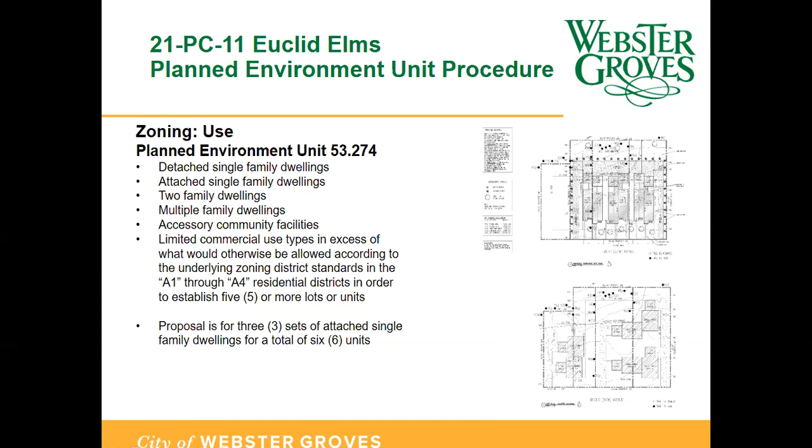When we look at density, this goes back to the 5 standard units under the basic A4 zoning requirements. Under the standard subdivision with the 120%, it would allow 6 units to be built versus the 5 in the standard subdivision. The proposal is for 3 sets of attached single-family dwellings for a total of 6 units. One plan in the packet was for townhouses attached to each other, all with a frontage on Euclid. The second proposal was for more, smaller clustered single-family homes with shared driveways to each pair, and would have 3 sets of driveways versus a one-way drive access. I'll go into more detail about the 2 different ones, but both of them were only proposing 6 units.

Under the dimensional regulations per the code, the minimum required front yard setback within the PEU gets established in one of 2 ways. You either take every house along that block and average them, but only if there's not a differentiation of more than 10 feet. In this case, because of the way the street works, there's a house on the far eastern corner that is very close to the street, making the differentiation more than 10 feet. So because of that, the front yard setback is established by the 2 closest properties on either side and the average of the 2 of them. Taking the 2 closest on either side of this grouping of properties, the average between them would establish a 19.04 setback from the front property line facing Euclid.

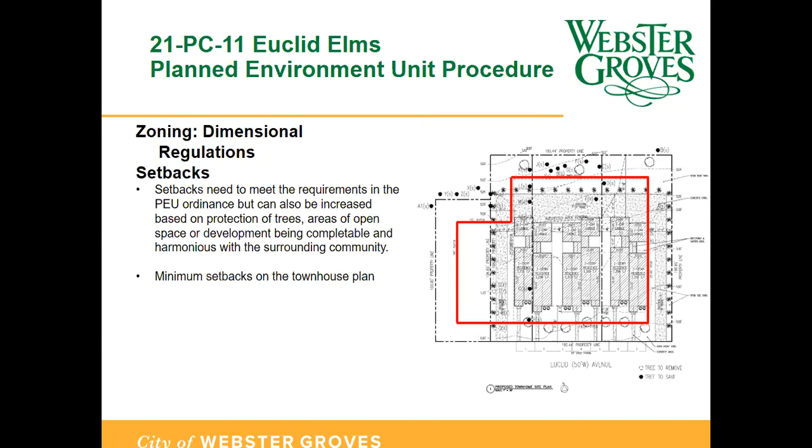This is the other scenario that proposes a series of clustered pairs. This is where the red setback minimum line is. Again, you can create something that's more unusual and you can do it as an attachment. It doesn't have to necessarily be - I know it's hard, sometimes there's the hard and fast rule of it being this many feet from a particular property line - but sometimes you can do it as an exhibit if you need a really unusual shaped setback.

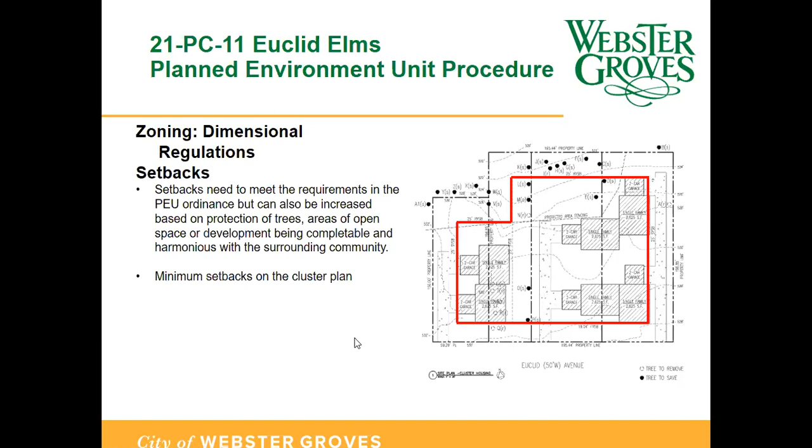The next dimensional regulation we always want to talk about is related to height. The PEU code allows a greater height than typically is allowed. Our A4 7,500 square foot residence district allows you to have 2.5 stories, no more than 35 feet. The way the PEU is established, you can have an increased outer buffer distance if you are going to exceed 3 stories. The proposal is not asking to go any taller than the 2.5 stories; in fact, it's proposing 2-story structures. So at this point, it's not asking for anything additional or any buffers because of that additional height.

Intensity of use is an important one because it covers 3 different things. It covers how much coverage is being done with structures on the property, which then relates directly to open space.

Lot coverage is a ratio of the footprint of the buildings in relationship to the overall size of the lot. We then also do a calculation related to floor area ratio. That is a ratio of the interior gross floor area of all stories of a structure in relationship to the total area of the lot.

And then the last one is minimum land area per dwelling unit. So when we have a requirement in our zoning code for a minimum lot area for a unit for a single family, we sometimes have reduced lot areas when we have multiple family. But in this underlying zoning of the A4, there's a minimum lot size requirement.

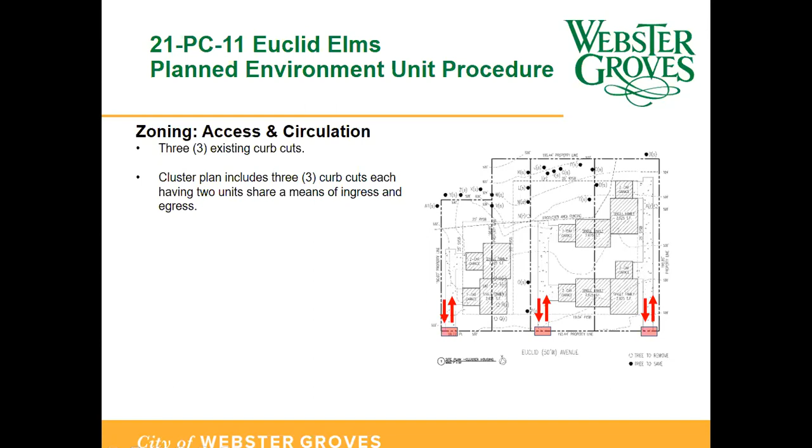So the next thing is Architecture Review Board. Every one of these structures will have to go before the Architecture Review Board. They would likely go through as a grouping together because of the way that they interact with one another. The applicant does plan to bring examples of housing types to the next meeting, because that will give some examples to help further develop what you think you need to put in the ordinance. But at this time, we weren't bringing any of those scenarios because we had so many other elements to make sure you understood that we needed to consider as we were looking forward for what additional information we might want from the applicants for the next meeting in order to establish a draft of the regulations.

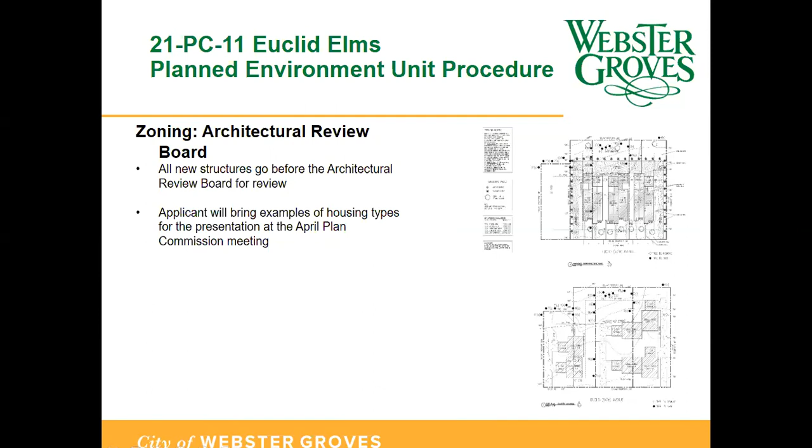So I'm about to get to the items to consider for inclusion in the ordinance. Before I get to that, are there any other questions about some of the analysis of the different elements?

I didn't necessarily have just one thing I didn't see in there, especially with that unbuildable lot. Do we know there's no existing easements or utilities of size in that area? There are none. It was not established as a paper street, and no easements were put in place for that area.

So for any of our members that are on Zoom, do any of you have questions? Okay, I'm going to move on. Nope, I'm going to move on to items for consideration for inclusion in the ordinance.

In your packets at the very end, I did start a very, very rough draft of some of the regulations, trying to keep in mind some of the important elements of consideration. One of the things would be placing a maximum number of units into the ordinance so that it's very clear how many units can be established.

The next thing would be creating setbacks. You have the ability to consider the setbacks that are in there, something that could be more restrictive, or a series of setbacks. You could make a requirement that certain units have to have a distance between them, but under the code, it's not required. So there's a minimum set, and then you can do others above and beyond.

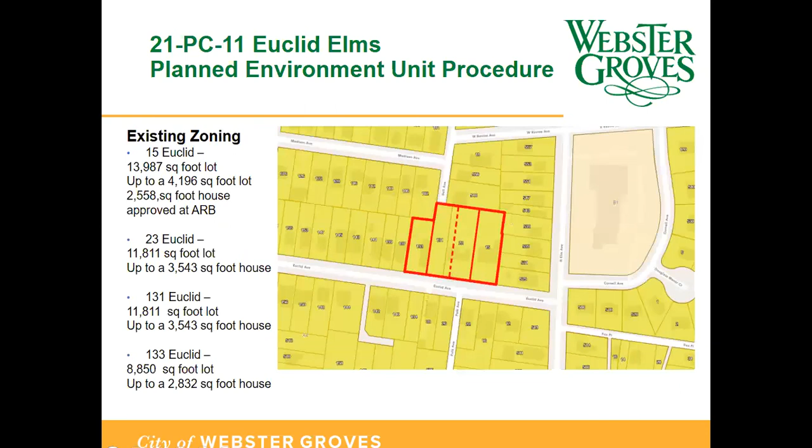Just so you know, their ordinance did not include a floor area ratio, because back in the 80s we didn't have a floor area ratio requirement. And their lots are interesting — if you look at how it shows up on our maps, there are these really large lots, but the condo plat is actually pretty tight. They gave them, I think, an extra 7 or 8 feet to do small decks off the backs of their homes, but the condo plat really establishes a very tight window around their structures.

Is that an A4 underlying zoning? Yes, that one was an A4 underlying, if I'm remembering correctly. And they did that to preserve the open space they had? They did that to preserve the open space and to preserve existing trees and tree canopy.

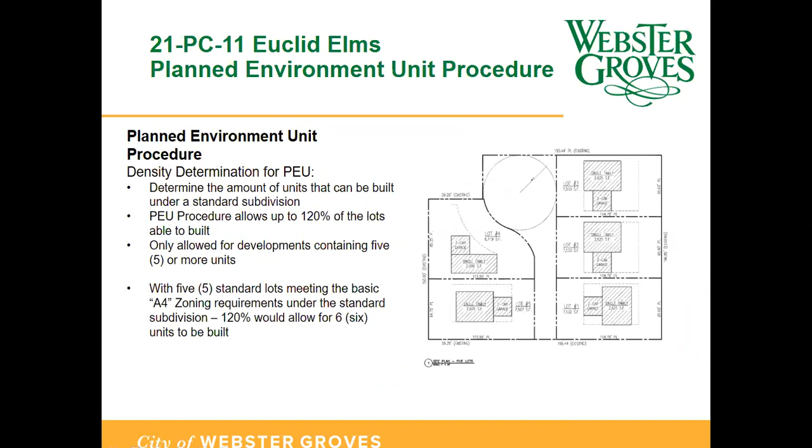My other question is about Hawken, Hawken Place, that's a condo, right? And was that a rezoning? That was a rezoning, to a B1, not a PEU. So that's a B1 multifamily, and then that was condoed out as townhouses.

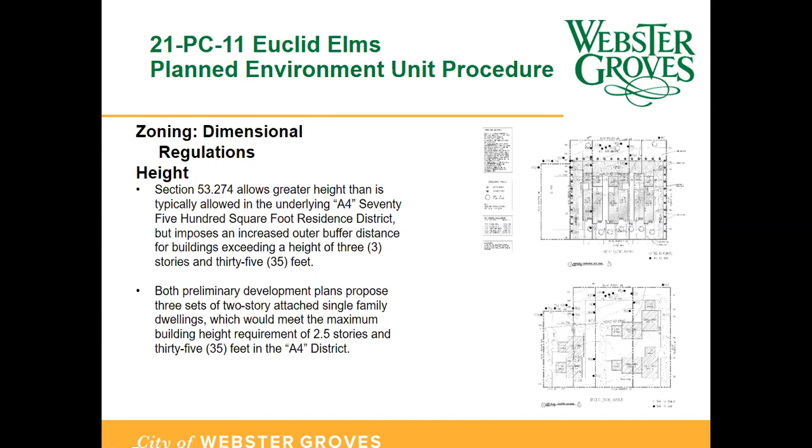Could you get us some numbers on floor area ratio and lot coverage of that development too, just to get an idea of sizing and mass? Yes, I will get the condo information for Hawken.

Thank you. Any other things, and this includes Plan Commission members online, any other things that you think you would like us, either staff or the applicant, to provide for the next meeting?

You said there were going to be drawings next meeting. They have some images of examples of the type of housing they're thinking about, in terms of the overall look, and of some other cluster type housing. They will be providing that, and it will be in the packets, so it will be available to both the commission and the public when the packets go out the Wednesday before the April Plan Commission meeting.

Why would a developer want to do a planned unit development? Is that just to avoid the rezoning? No, because you can't actually rezone this to do anything more. We're in the most intense zoning district already. These lots have minimum lot widths of 60 feet, so you can't cut them down any smaller unless they're going to put in the full turnaround and circle drive.

These lots are really deep, and in being really deep, it doesn't necessarily do much for the residents. The resident who buys the house could build a really big house on it, but might not, and then is paying taxes on all of that land. So you're paying taxes on a 13,000 square foot lot in an area where the minimum lot size is only 7,500 square feet, but you can't split it because we don't allow flag lots, where you drive a driveway and access behind—you have to have street frontage. So you're in an unusual situation, you've got both of these things happening.

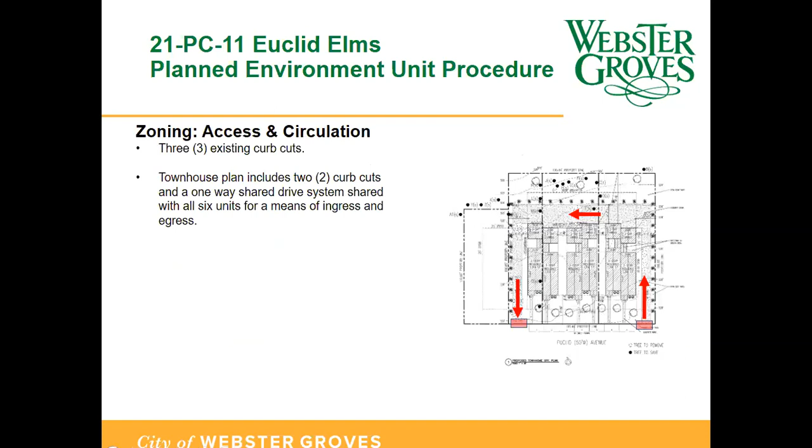So when you come back to what you have to consider, you're supposed to look at whether it's consistent with good planning practice and good site planning, that it can be constructed and operated in a manner that's not detrimental to the permitted uses of the district, that it's visually compatible with the uses of the surrounding area, and that you also consider the architectural relationships, landscape relationships, and any other relationships between the proposed development and the overall character of the surroundings—the other houses, the other house lots—and you will prescribe, or in your opinion can prescribe, some things that would help enhance the neighborhood character.

On top of it, it has to accomplish 2 or more of these objectives: retaining and avoiding damage to a substantial number of existing trees, minimizing the grading of the site, retaining a substantial amount of open space, and developing the exterior building design to be compatible with the nearby residential development.

So all of those come into play. In addition are the 5 factors: it isn't going to do harm for the community, isn't going to overtax public utilities, isn't going to cause traffic hazards or congestion. I'm going to forget there's another one—I didn't put them in here because I was going to put them in the next hearing with all of the different things, with all of the regulations.

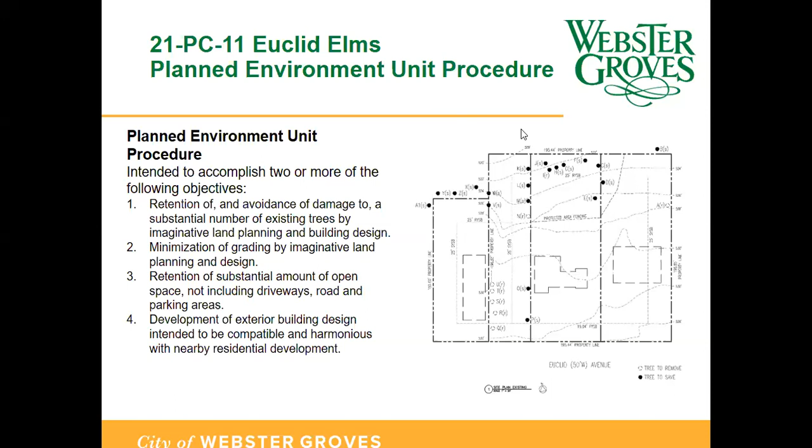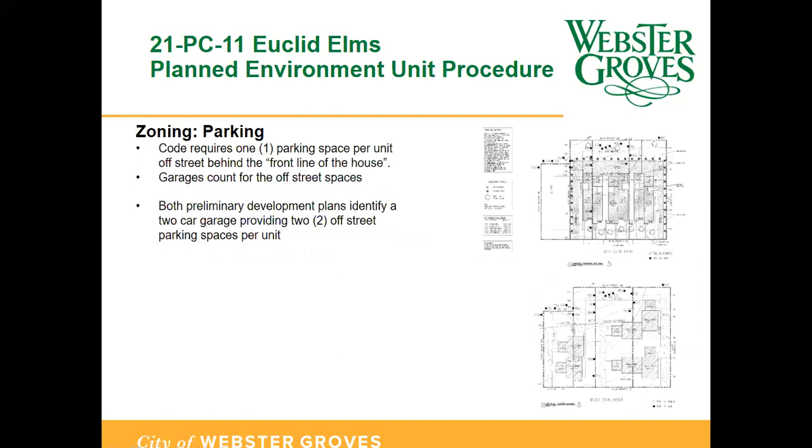We have no plats or site plans tonight, so it's adjournment of the regular session, and we have no executive session. So, other business — I don't think I have any other business at this time.

If anyone has any questions — yes, my wife keeps asking me this: what coffee shop is going in next to the bank there, the Regions Bank? So I don't actually have a name of the coffee shop yet. I'm sorry, I can't help her curiosity on that one. I'm going to have her call you next time.